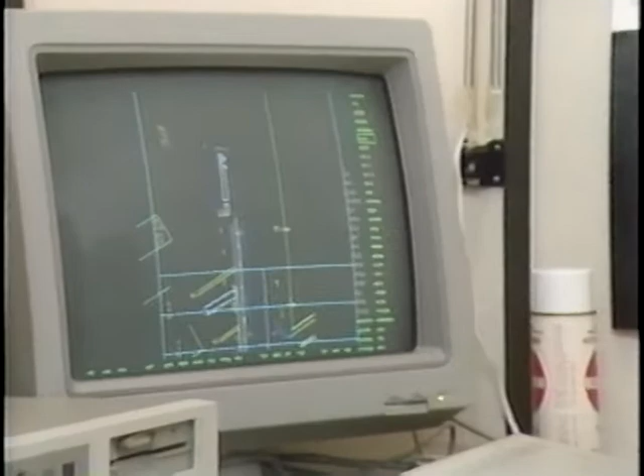This program is about multi-story steel frame buildings. Whether 2 stories or more than 100, they present common architectural and engineering challenges. We will address some aspects of planning, design, function, and construction. In Part 1, we examine the lateral loads which multi-story buildings experience and some fundamentals of design, including the vital communication between structural and architectural design.

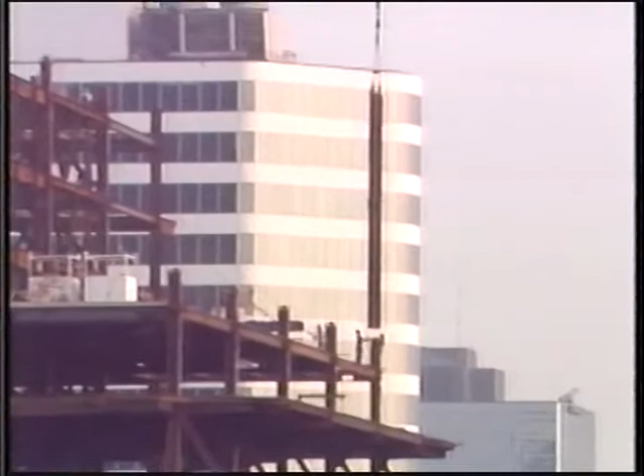In Part 2, we show how steel framing supports the structure, with particular attention to floor framing systems and the integration of essential services. We will also see how the design comes together in actual construction.

Multi-story buildings can expand the scope of suburban areas, or they can rejuvenate urban areas. Their size varies widely. Planners use the term density to describe building size. That is, the ratio of floor space above the ground in relation to the area of the building lot. Densities of 2 to 12 are common, and they can reach 25 or more. Zoning bylaws restrict densities and height and impose stringent rules to create open space and reduce encroachment on neighbors. Buildings built today require longer floor spans and new high-tech services.

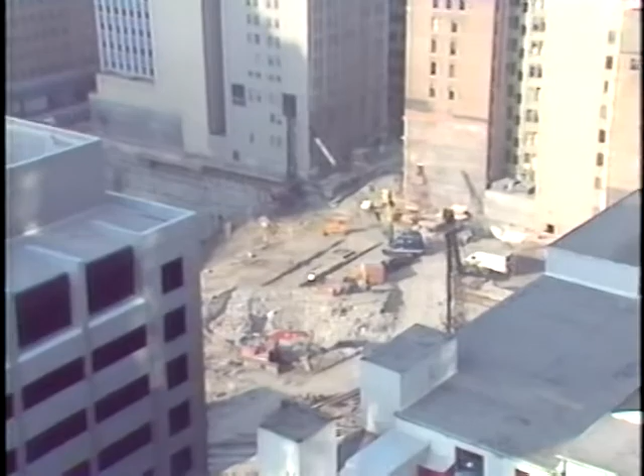The first step in urban construction may be complete demolition of the existing buildings. However, there are other options. Floors may be added to an original structure. Due to the foresight of the builder or the heavy floor loads required by an earlier occupant, this building has reserve structural capacity required to support these 6 additional floors. In this case, the new construction encapsulates the original building inside its new skin. In the third instance, the original structure and its facade are maintained. The new architecture contrasts dramatically with the old.

Whether modified or new, the structure must contend with the forces of man and nature. Nature's influence on multi-story buildings takes 3 primary forms: gravity, wind, and earthquake. Gravity or vertical loads are primarily due to the mass of the building, its furnishings, and occupants. The effect of building height on gravity loads is more or less linear. Wind loads multiply exponentially with an increase in building height. Earthquake or seismic loads vary depending on location and expected severity of an earthquake, based on our short-term historical knowledge.

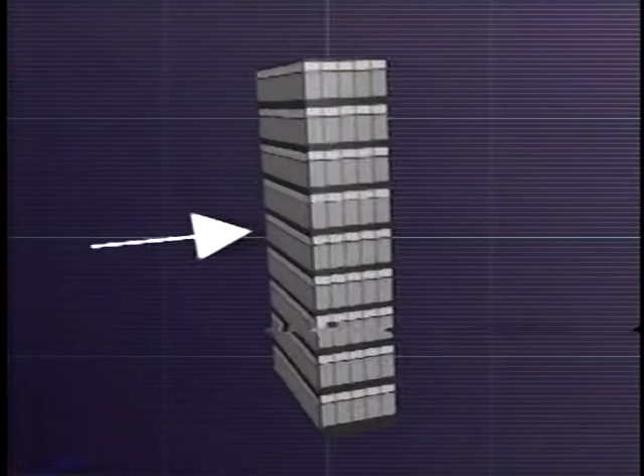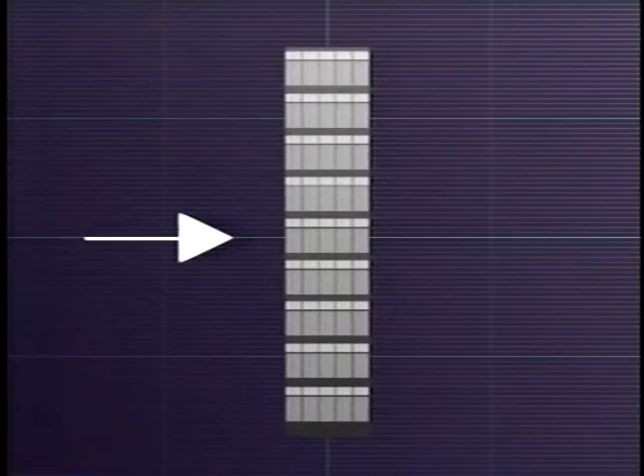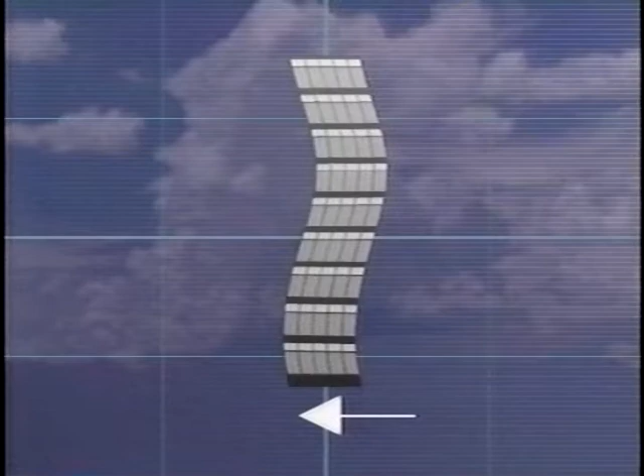For this reason, over and above architectural constraints, the major consideration in developing a structural concept is the capacity to resist lateral forces. Wind loads on the walls are transferred to the structural frame through the structural framing and floor diaphragms. Since all building materials are elastic, these loads will cause a structure to deflect laterally in accordance with Hooke's law. Earthquakes have a similar effect, although forces are exerted on the building by movement of the Earth's crust. The building forms its own movement mode in response to the vertical and horizontal accelerations of its foundations. The designer's major concern in this case is the prevention of structural collapse under extreme loads.

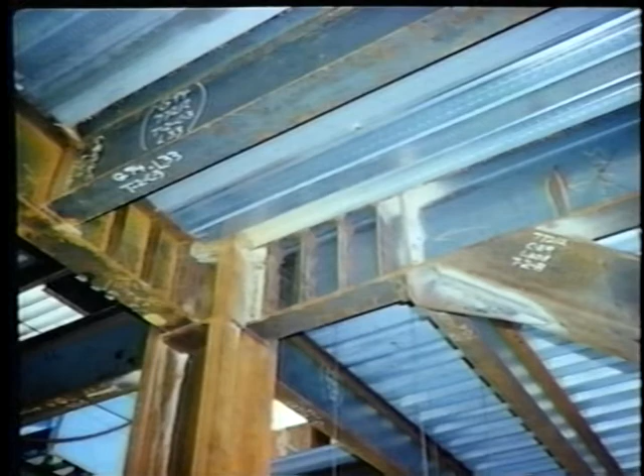Structural steel buildings are renowned for their ability to withstand major earthquake shocks. The reduction in building mass because of steel's high strength-to-weight ratio reduces seismic forces on the building, and the ductility of a well-detailed frame allows it to resist many cycles of extreme load without failure. There are various lateral load resisting systems to be considered. The basic types encompass bracing, rigid frames, and shear walls. These systems act as vertical cantilevers, anchoring the building frame to the foundations. Their function is straightforward, but each is unique as demonstrated by their simplistic deflected shape.

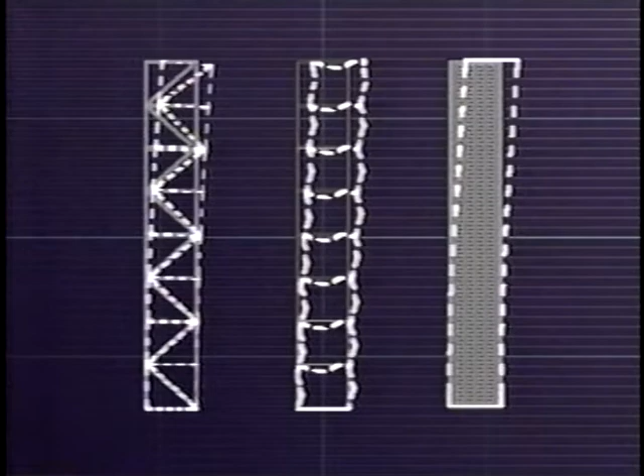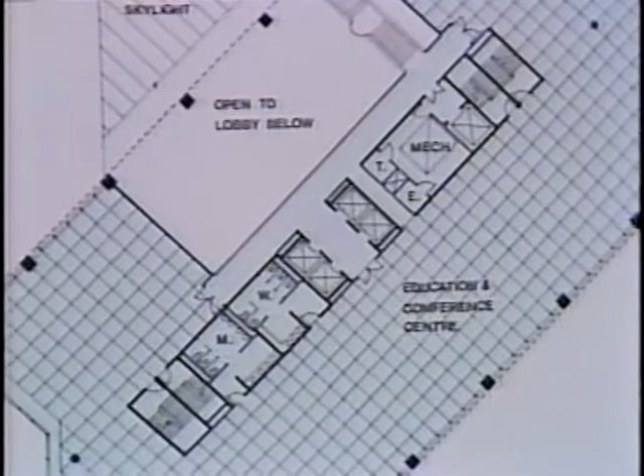Let's consider first the steel-braced lateral load-resisting system. A single-story building frame demonstrates the function of bracing in its simplest form. The performance of each element is clear and simplistic. But as the building height increases, the loads and complexity of the system also increase, and the location of these essential structural elements takes on greater importance. Obviously, the design team of structural engineer and architect has to work closely together. Only in this way can they ensure that the lateral load-resisting system selected meets the needs of the structure and is compatible with the architectural concept.

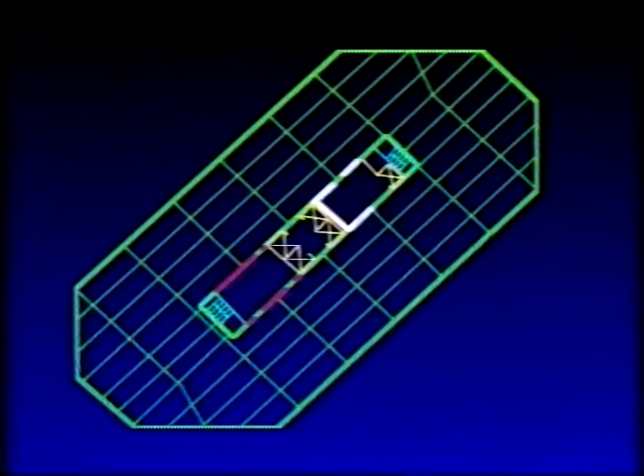One fundamental difference between single-story and multi-story buildings is the need for a service core. It's usually centrally located and holds elevators, stairs, and washrooms, plus mechanical and electrical services. This core is also a logical location for the lateral load-resisting system. Now, let's add more floors. Careful proportioning of the brace frame members will be required to comply with the functional design and still meet the structural design criteria because the core will tend to be more slender. As buildings increase in height above 40 stories, a core system becomes less efficient.

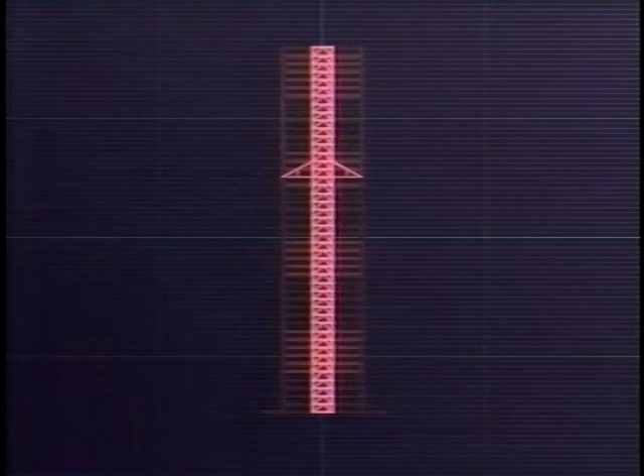However, the braced core can be propped by adding one or more pairs of outriggers off the vertical bracing trusses. These stiff elements, attached partway up the core, transfer forces from the core to columns along the outer walls of the structure. This provides the maximum possible base width for the lateral load-resisting system and the maximum control of lateral deflections. Before we look at higher buildings, let's go back about a century.

Gustave Eiffel faced these same structural challenges in the design and construction of the Eiffel Tower. It was built for the Paris Universal Exposition in 1889, and at 300 meters was, for many years, the tallest tower in the world. The basic structure and the lateral load-resisting system are one and the same. The tapered shape has two effects. First, it lowers wind loads as height increases because the surface area reduces. Second, it provides the wide base required to resist the large overturning wind moment.

Let's explore this concept further and think of the tower as a vertical cantilever. The wind pressures Eiffel assumed on the cantilever created a shear force diagram, which looks like this. From the shear diagram, we can calculate the overturning moment diagram, which varies exponentially with height. Let's be unconventional for a moment and reshape the bending moment diagram to form a shape symmetrical about its vertical axis. Now, compare this shape with the shape of the tower, and we find a remarkable resemblance. Eiffel capitalized on the laws of nature. He shaped his tower to the wind bending moment to maximize its structural efficiency.

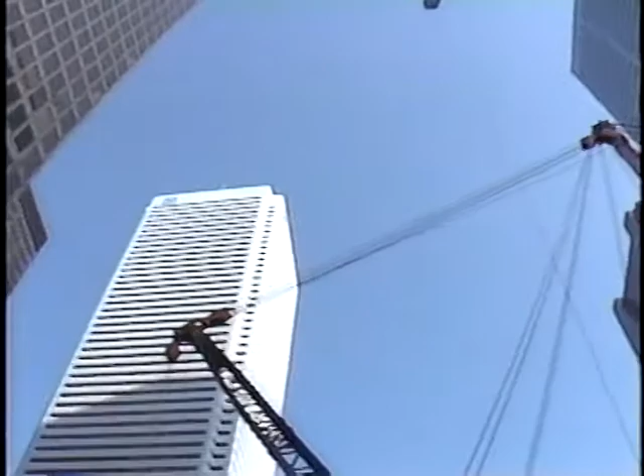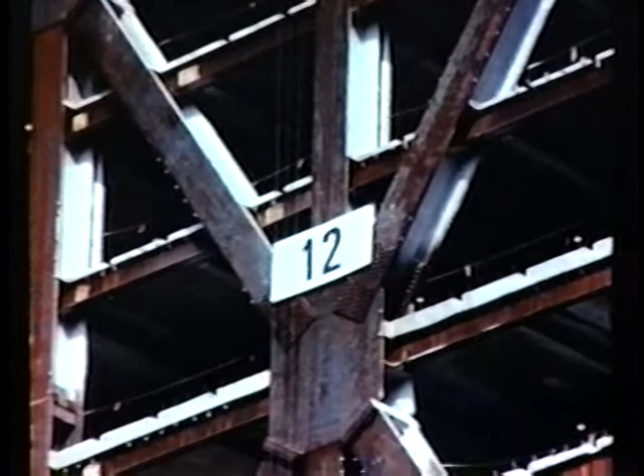Today, we face man-made forces in addition to nature's. If Eiffel had been faced with our building codes, zoning bylaws, density controls, and height limitations, his tower might have had quite a different shape. This 100-story structure, built 80 years after Eiffel's masterpiece, benefits to some extent from the same theory. The world-renowned designer, Dr. Fazlur Khan, found that by selecting this tapered shape and placing wind bracing on the exterior walls, there was no premium for height, no material added to control lateral deflections. Bracing members transfer forces across the face of the structure and around the corners, making the frame perform as a whole, more or less like a box or a tube, hence the term braced tube.

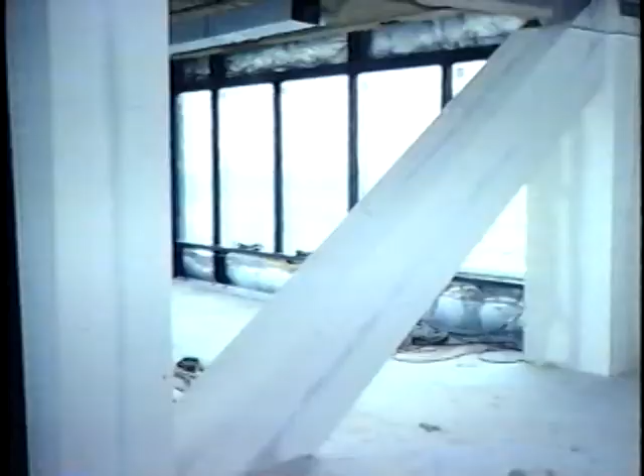Now we have seen diagonal bracing used from 1 to more than 100 stories, but what if we build without them? This involves an entirely new concept, the rigid frame. The rigid frame is formed by rigidly connecting columns or verticals to girders or horizontal members. Lateral forces are resisted by bending and then by axial loads in the columns. The rigid frames may be located on the perimeter frame of the building or throughout the entire structure. Rigid frames are often used where ductility is required for earthquake resistance.

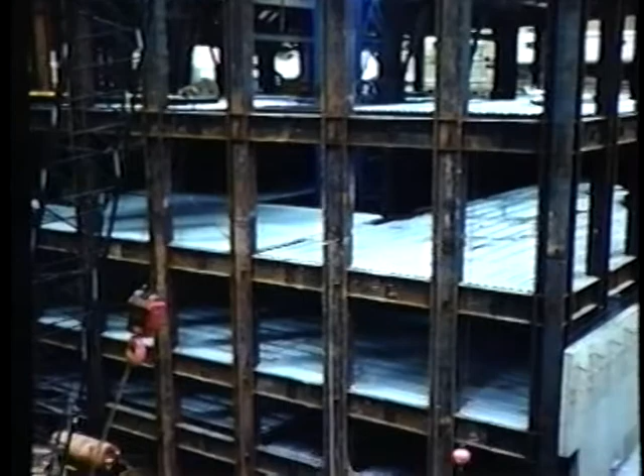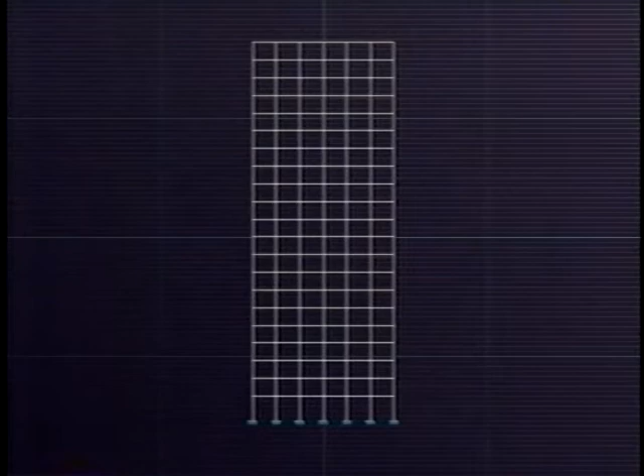In shorter, rigidly framed buildings, girder lengths are usually 2 to 3 times the story height. As building heights increase, rigid frames with widely spaced columns become less effective because of the lack of girder stiffness. If columns are placed more closely together, girder length is reduced, stiffness is increased dramatically, and a framed wall is created. Stiff connections can be provided to transfer forces around the corners of the building frame, making the structure perform as a tube, logically known as a framed tube.

This structure has the obvious characteristics of a framed tube, with a deep steel spandrel girder. Closely spaced columns breaking the span of the girders are somewhat disguised by the horizontal accentuation of the architecture. In a similar structure, the architecture has a dominant vertical accentuation. The deep spandrel girders that match column stiffness and create the tube effect remain hidden behind the glass facade.

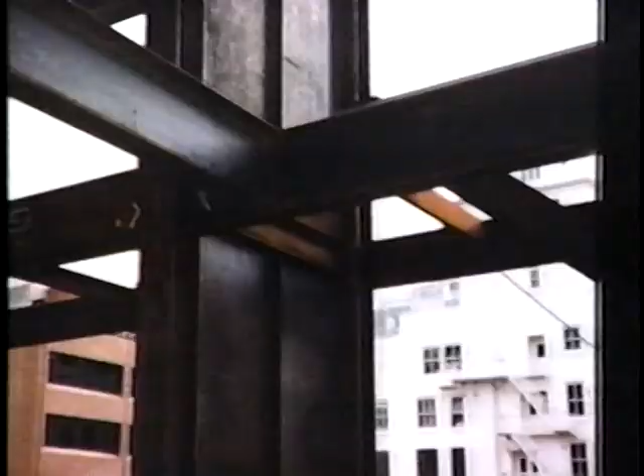There is one more major lateral load-resisting system to consider, the shear wall. The obvious location of shear walls is in the building core. Methods of building the core can vary dramatically. In this example, steel shear walls resist lateral forces directly in shear and bending. Each wall consists of a thin steel plate with edges stiffened by columns to form what is, in essence, a deep beam, cantilevered off the foundations. Larger steel plate core walls have also been used.

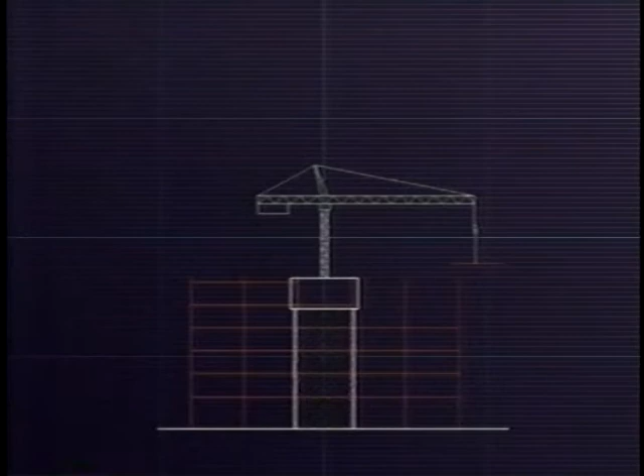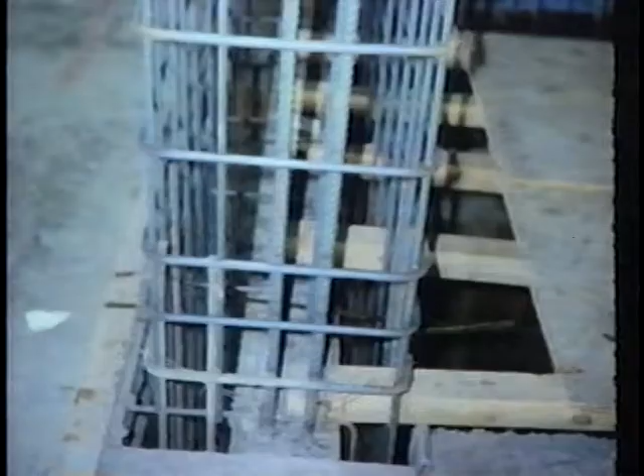Frequently, shear walls in the core are concrete. These cores may be built ahead of the steel frame, with the steel frame, or behind it. Concrete cores built at the same level as the structural steel do not allow maximum efficiency of either core or frame construction, so we will not consider that method further. When steel frames are built ahead of the core walls, steel erection may proceed independently of other trades. Temporary steel columns, extra steel beams, and temporary bracing must be used to resist construction and wind loads on the frame. Infill shear walls are cast after steel erection.

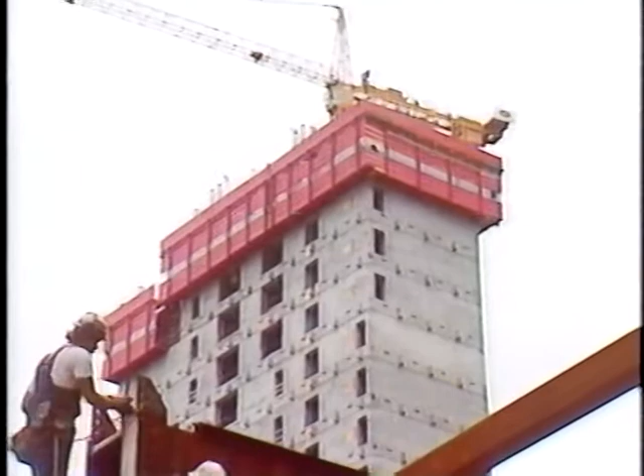When the core precedes the steel frame, the vertical gap in construction avoids conflict between core construction, steel erection, and other trades which follow. In a core ahead project, an experienced contractor will accelerate core construction to a maximum because the steel frame will proceed at a faster rate and catch up. Ideally, the catch-up does not occur until the top of the building is reached.

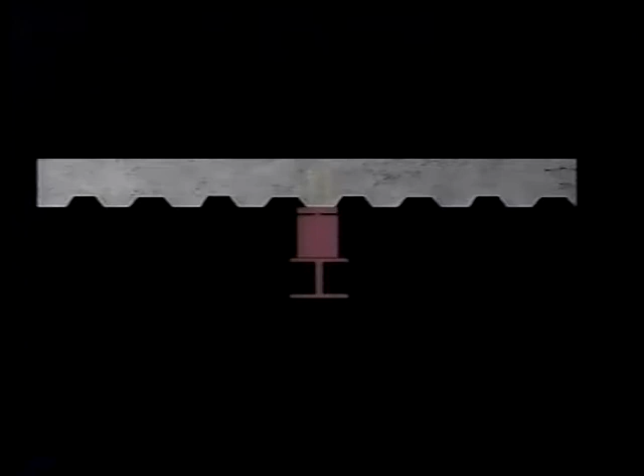As we have seen, multi-story buildings indeed have many facets, including height, size, and shape. We have reviewed lateral loads and structural systems to resist these loads. When we continue with Part 2, we will explore some of these systems in action, along with various floor framing systems. And we will also explore the construction techniques used to erect steel-framed buildings.

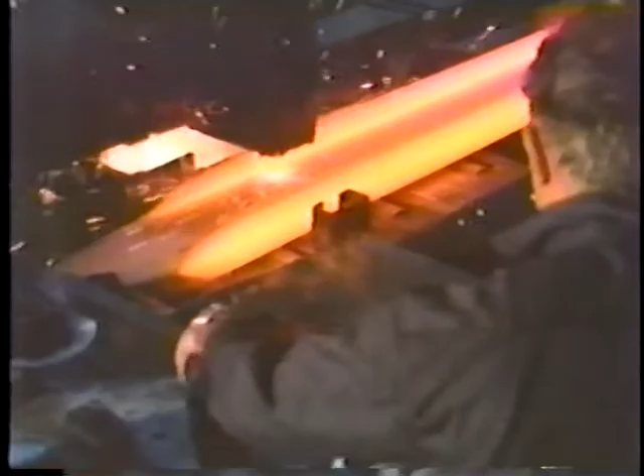In the first part of this program, we reviewed basic multi-story concepts and lateral load-resisting systems. Now let's look at floor framing systems and steel frame fabrication and construction. Since floor framing systems represent a major component of multi-story building costs, they demand particular attention. The simplest and most conventional framing system is hot-rolled wide flange beams. This is the least expensive material, requiring a minimum of fabrication labor. Mechanical ducts may pass beneath the beams or through holes cut in the beam webs during fabrication.

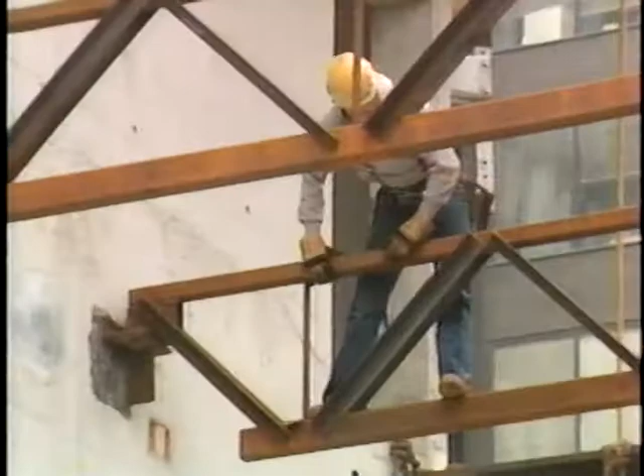Trusses are an alternative framing method. Triangulated web members in one of several configurations join top and bottom chords together. Trusses are lightweight, efficient on long spans, and they provide ready-made openings for services. There are other advantages. Because each component may be sized for specific tensile or compressive loads, we can achieve considerable cost savings in spite of the increased labor for fabrication.

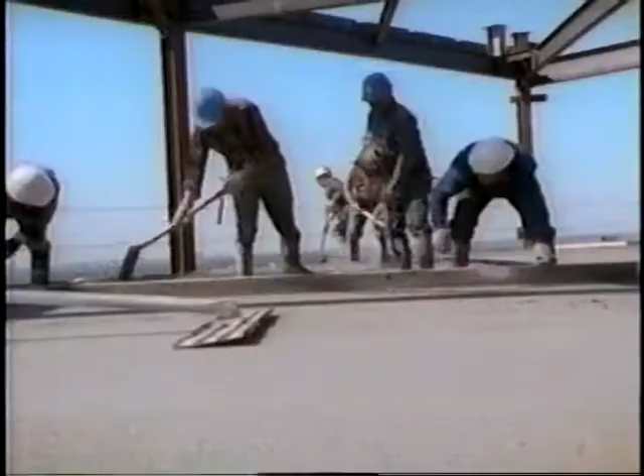We can capitalize on the standard concrete floor slab placed on steel beams or trusses by using steel as the tensile component and concrete as the compression component in flexural members. The resulting compositely designed members provide a more economical use of the structural steel.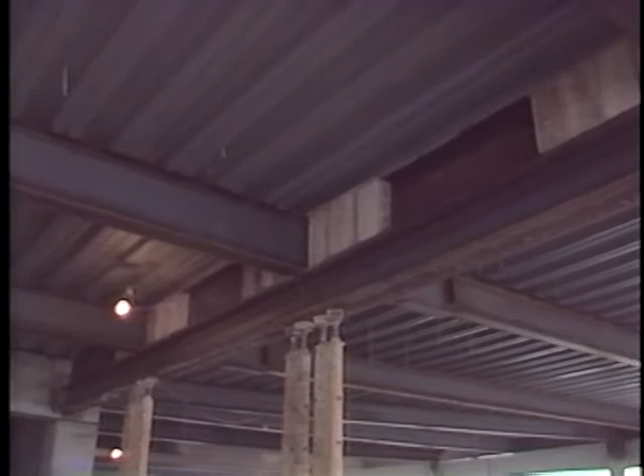Although beams and trusses may be composite or non-composite, a third floor framing system, the stub girder system, must be compositely designed. This system was developed to minimize both structural steel content and building story height, and in this case, the concrete floor slab must be connected to the stub girders with shear studs, forming the top chord of a composite member. Since stub girders develop a substantial part of their strength from the concrete cover slab, they must be shored while the concrete is placed and cured. Beware of unnecessary expense for excessive shoring. A simple arrangement of shores is usually all that's necessary.

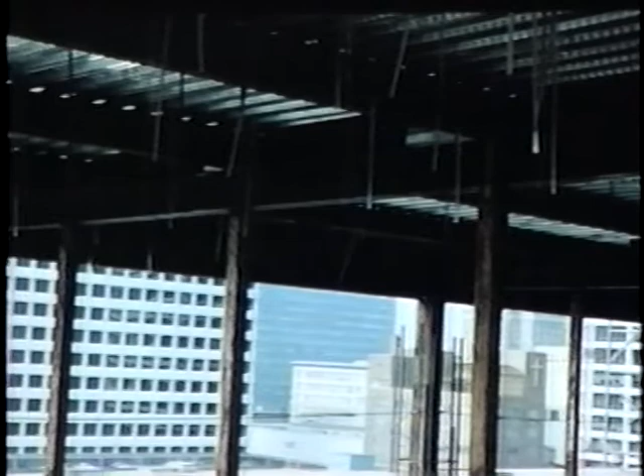The size of a column shaft is governed by the loads at the lowest story of that tier. The upper levels of a tier will be somewhat oversized, but using the same size member for 3 stories means that floor framing at all 3 levels will be the same length. This increases the number of identical pieces and reduces the number of shop drawings. It also cuts down on the risk of error or fit-up problems during construction.

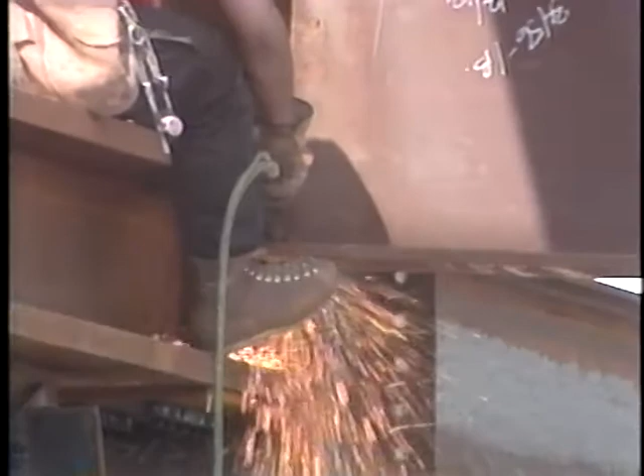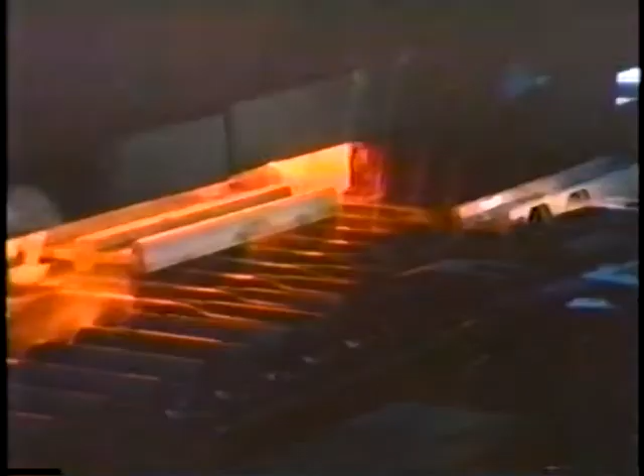While we have been preoccupied with design, steel making continues as an ongoing process at the mill. The basic oxygen furnace feeds the continuous casting lines, producing dog bone shapes destined for wide flange beams, and slabs destined for the plate mill in anticipation of orders. When design is complete and a contract awarded, the next step is ordering the steel. Various quantities of sizes and shapes will be required. The steel fabricator prepares order bills for material and shop drawings for each component. These drawings provide precise dimensions and identify fabrication procedures.

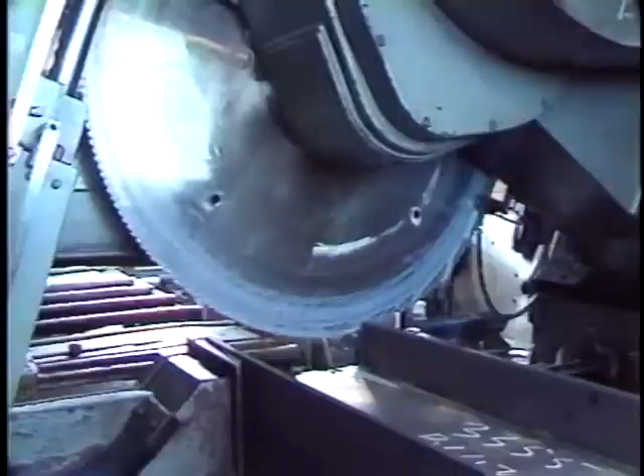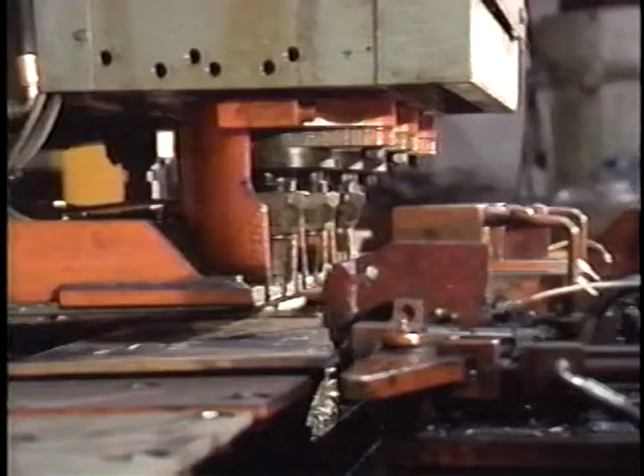Beams and columns can be cut to length with a cold saw that leaves a square finish acceptable for many applications. Larger columns, both hot-rolled and those fabricated from plate, will normally have the ends milled for squareness. Once the materials have been cut to length, a computer-controlled beam line is used to drill holes for connections. Smaller pieces are sheared to size and holes are punched as required. Fitters and welders add the connections to the beams and girders for assembling the components into the building frame.

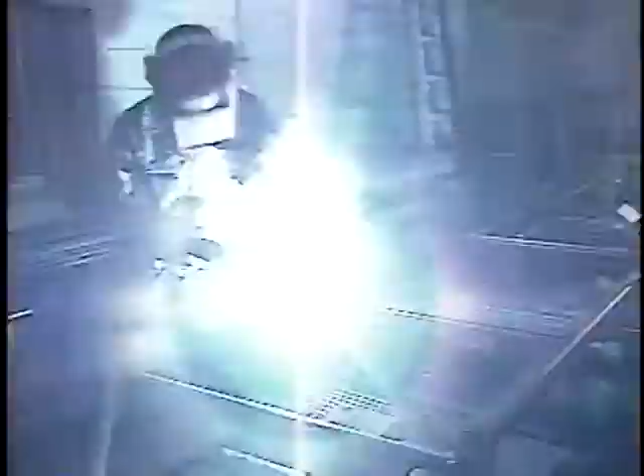Trusses are fabricated from pre-cut components and welded on an assembly line basis. Today's trend is to long spans, and provision must be made for the flatness of such long span floors. Trusses and beams designed to act compositely with concrete floors are light and slender. They will deflect under the weight of the concrete.

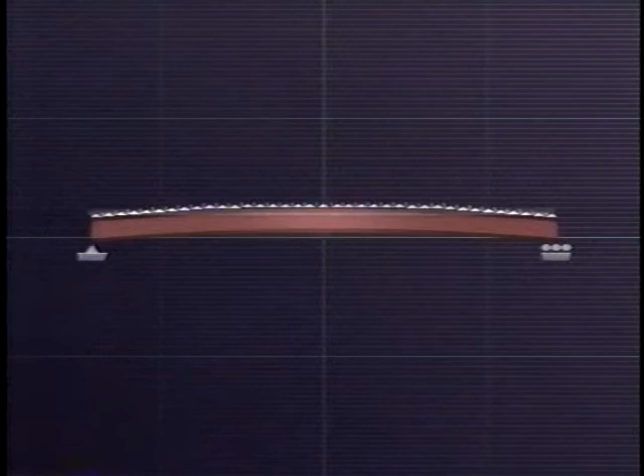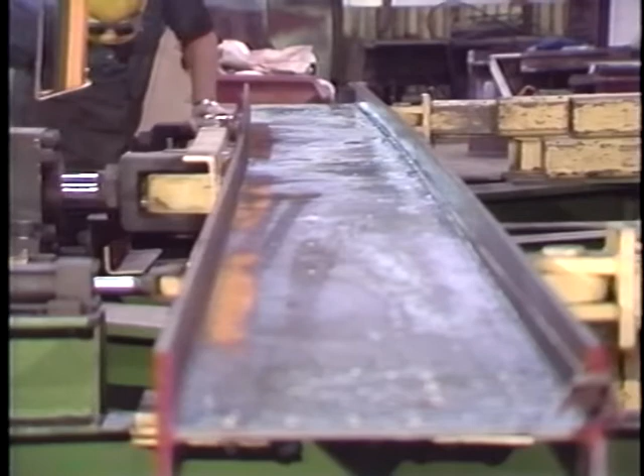To counteract this, an upward curvature called camber can be introduced to assure a flat floor after the concrete is placed. After the concrete is cured, the beam is very stiff and deflections are small under live loads. Beams may be cold cambered by bending with hydraulic jacks. In this operation, the steel exceeds its elastic limit and yields. But don't worry, the beam maintains its original strength.

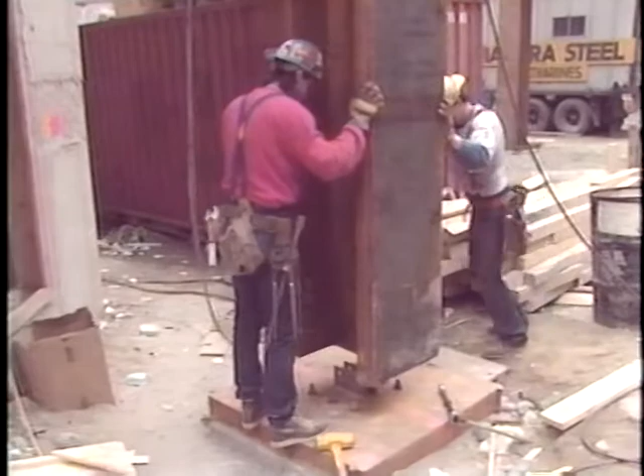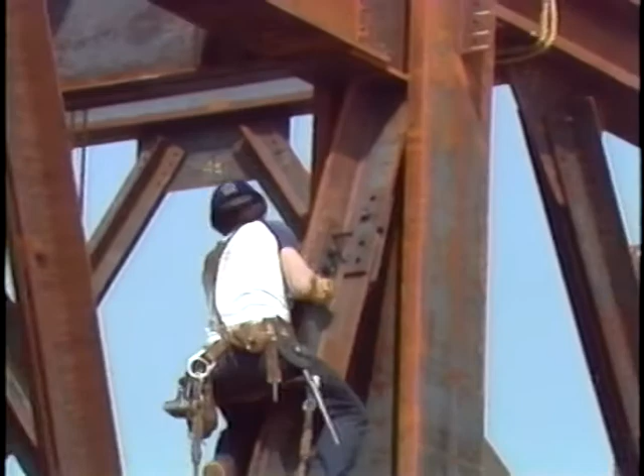Trusses are treated in a similar fashion, but cambering is set up in the jigging operation so that a predetermined amount of curvature is fixed before welding. With fabrication complete, we begin erection. This building has a braced core to provide the lateral load resisting system in both directions. A team of iron workers, often called the raising gang, erects the core elements, the columns, the girders, and the diagonals forming the lateral load resisting system.

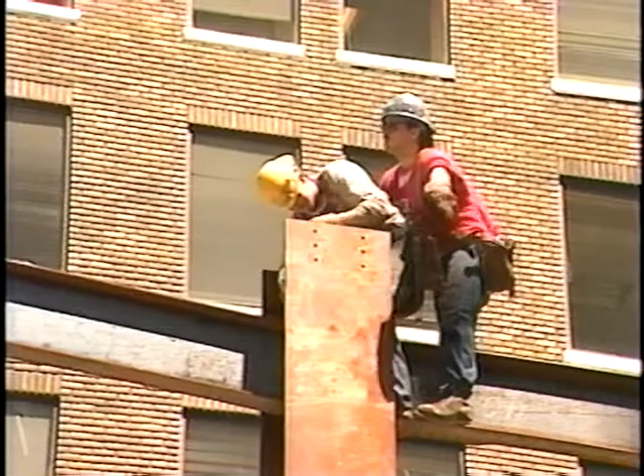The crane operator is directed by radio or hand signals as he places the steel where highly skilled iron workers, known as connectors, bolt the members in place. All framing is plumbed and leveled with precision surveying equipment and is held in place with plumbing cables until the bolting up crew and welders complete the connections.

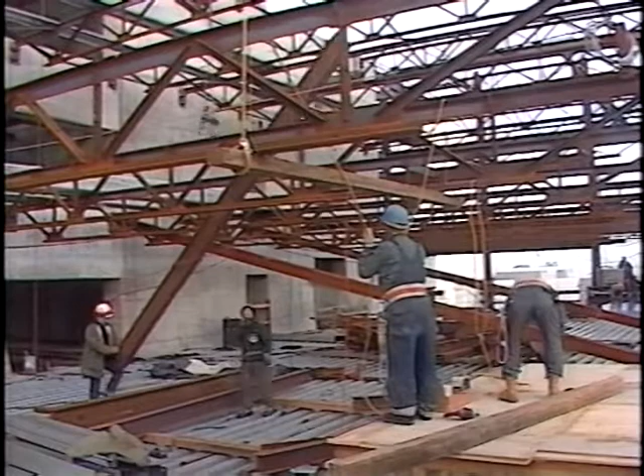Exterior columns are next, followed by the primary framing members, which tie these columns together and tie them to the lateral load resisting system. Once all the secondary framing members are in place, the connections complete and the frame plumbed and squared, the steel floor deck is placed and fastened to all floor framing members. The deck serves as a working floor for iron workers, proceeding with the next tier of steel, and as a safety floor for workers above and below.

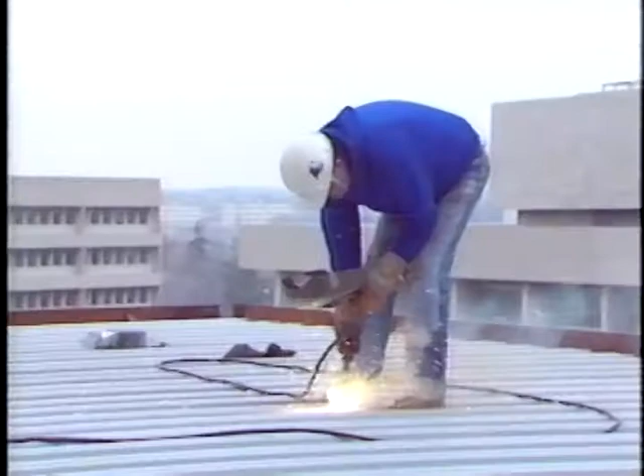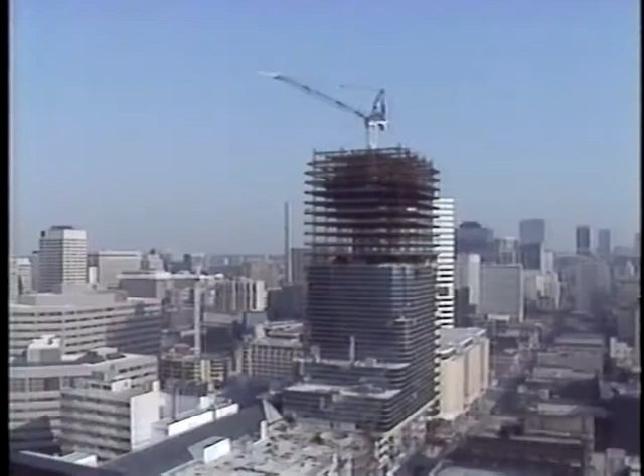Stud shear connectors can then be welded through the deck into the steel framing in areas where the floor framing members are compositely designed. The steel floor also performs an essential function as a structural diaphragm, holding the frame in vertical and horizontal alignment and tying the elements into the stabilizing core. Several levels may be built using this temporary system for stability.

A concrete cover slab is placed on top of the steel deck to provide the finished building floor surface and to provide a stiffer, stronger structural diaphragm. This diaphragm is considered a structural element and is used to stabilize columns in the completed structure. Let's look at some of the techniques used to expedite structural steel erection.

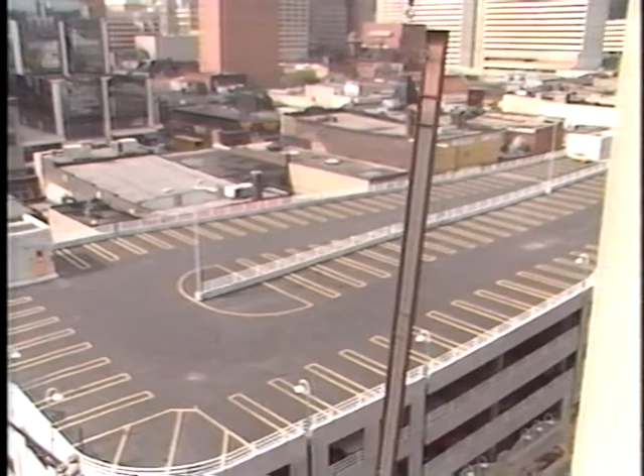Single-piece lifts from ground to work level can occupy the crane for long periods while the hook travels up and down the building. This becomes more critical as structures reach higher. It's more economical to hoist bundles of steel to the work floor, where they can be placed quickly and efficiently using a light runner line on the crane jib.

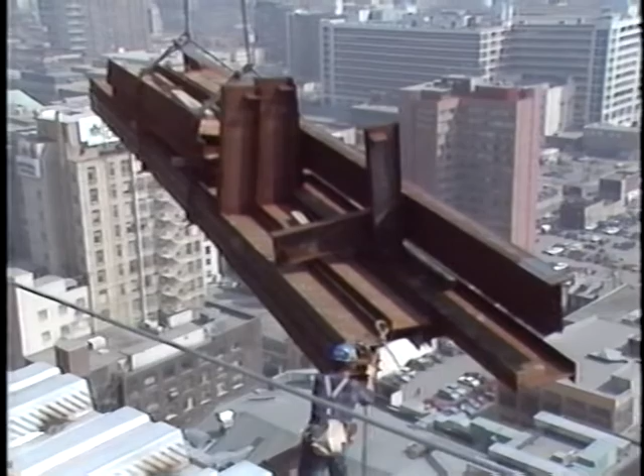Sometimes framing members can be pre-assembled on the ground before being hoisted, saving valuable labor by connectors. This is particularly important at the exterior of a building, where exposure to falling is greatest. The crane is also tied up for less time. As soon as the steel assembly is temporarily connected, the crane hook can return for another lift.

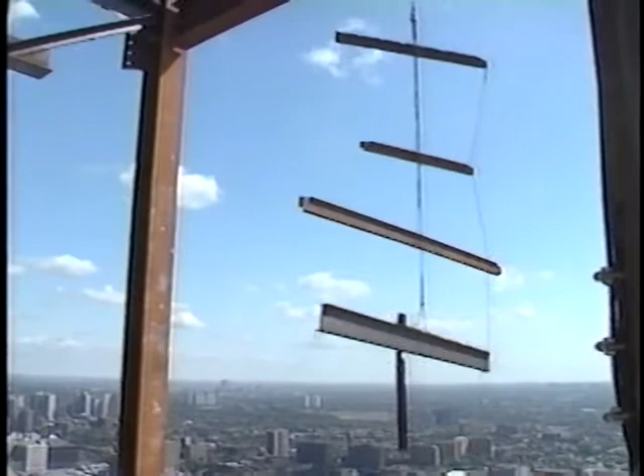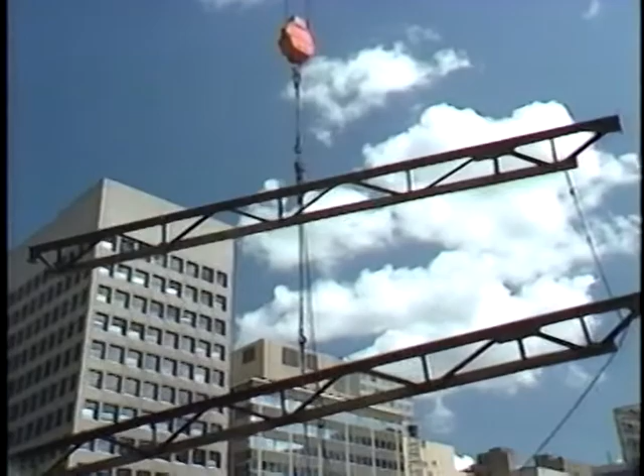Multiple member lifts, slinging one above the other, are also frequently used on higher buildings. These may be hoisted from the ground or from a stockpile on the work floor. While each beam or truss of one lift is bolted in place, the rest of the crew prepares a new multiple lift, and erection proceeds bay by bay around the building.

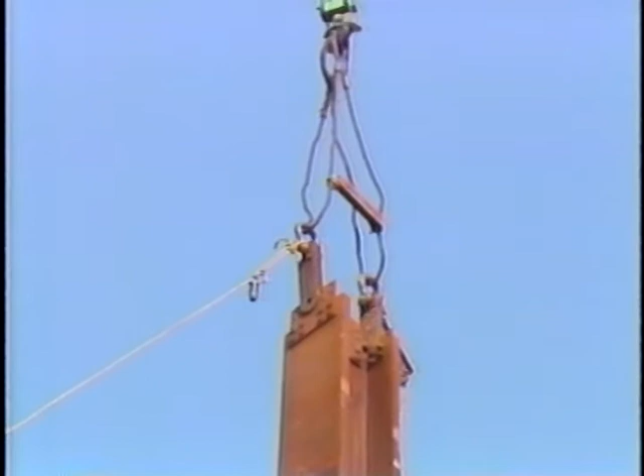Every effort is made to avoid having the connector climb a column to unhook the crane with such devices as quick release hooks, but sometimes a little assistance is required. Next to their spud wrench, usually required for aligning bolt holes and temporary connections, the crane is the most important part of the erection gang's equipment.

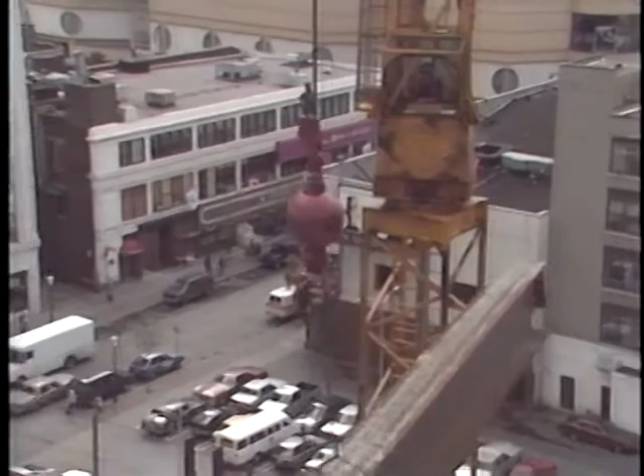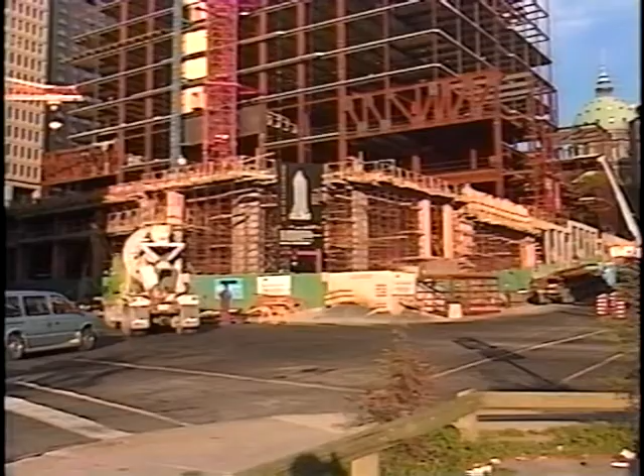There are numerous kinds. In buildings up to 15 stories or more, a mobile crane can sit on the ground outside the building footprint. It will not apply any loads on the building, and construction can proceed without consideration of forces from crane operation. Stationary tower cranes outside the tower footprint can be used on taller buildings, but they must be tied to the frame for stability, which results in some lateral loads being applied to the building frame during crane operation. At the other end of the scale, this crane relies on the building frame for the support of all vertical, horizontal, and overturning forces.

This is one of the world's most advanced cranes. The crane is jumped or hoisted up the tower as each tier of steel is completed. It takes only 15 minutes for the jump, and the crane is out of service for less than 2 hours. The first step is to release the secondary support on the crane tower.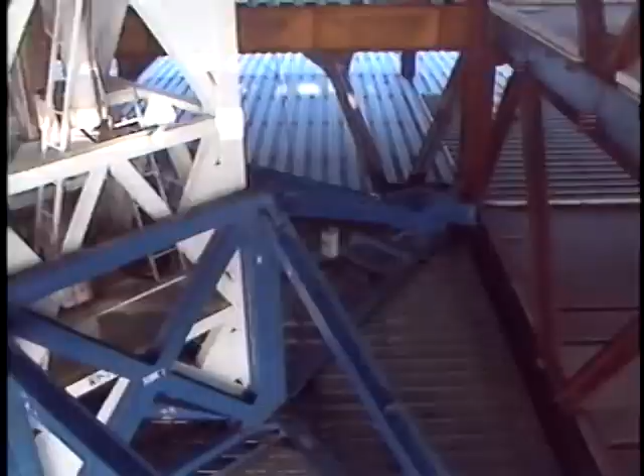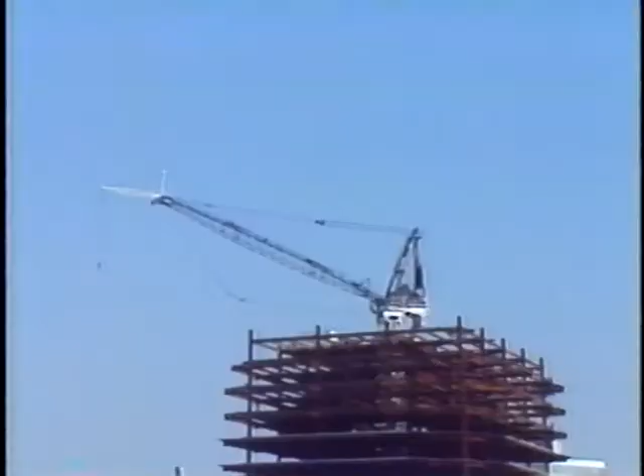Support brackets are hydraulically retracted, and the entire support frame is winched up the tower, guided by rollers running up the corners of the core columns. Once this support frame is secured to the building frame, it becomes an anchor for the hoists, which lift the main support platform and the entire 150-ton crane 12 meters or more up the tower. It is then secured and back in operation.

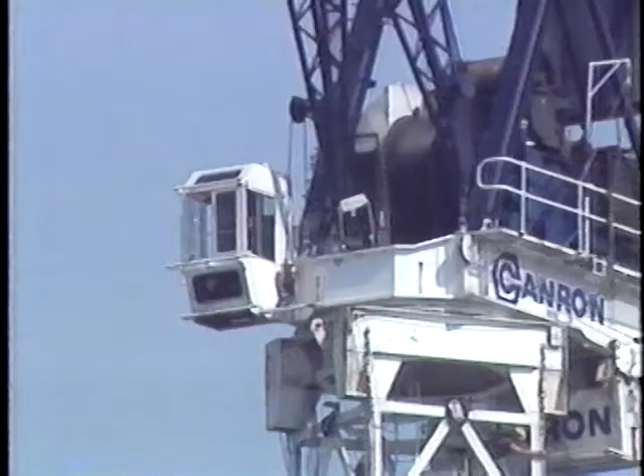The building core design may determine the type of crane used. An all-steel building with a steel-braced core is the simplest. Only one trade is used, and the erection crew's efficiency is at a maximum. Other approaches are common. In this sequence, we can see a special core form system which uses hydraulic jacks to lift itself up the building, keeping the crane free for other duties. This is particularly important when core construction and steel erection are proceeding separately, as mentioned earlier.

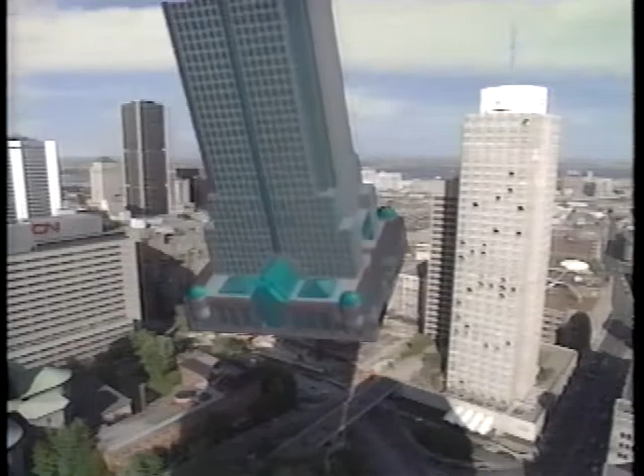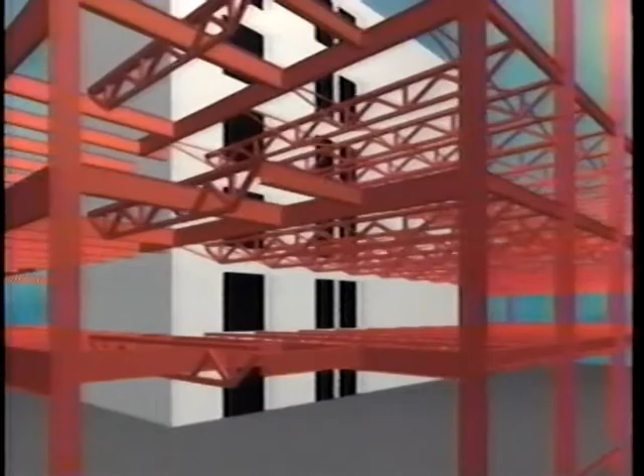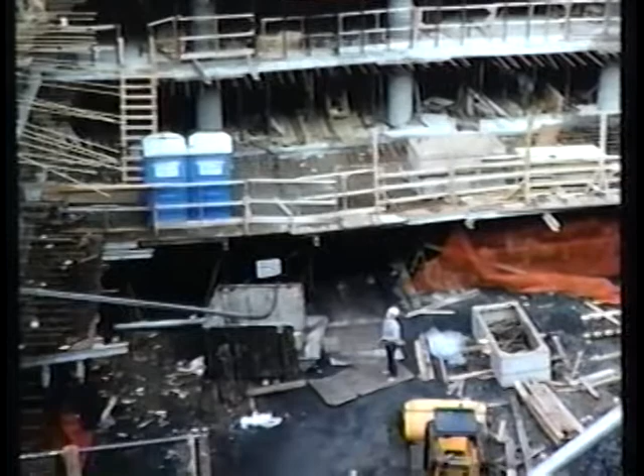Now let's put it all together. This bold statement on the skyline was inserted between two landmark buildings. Inside the facade of stone and glass lies what appears to be a complex building structure. But a closer look reveals a framework of simple elements connected together to create a large clear-span floor area. Construction began with a bus terminal, a parking garage, and other service areas built 5 stories below street level.

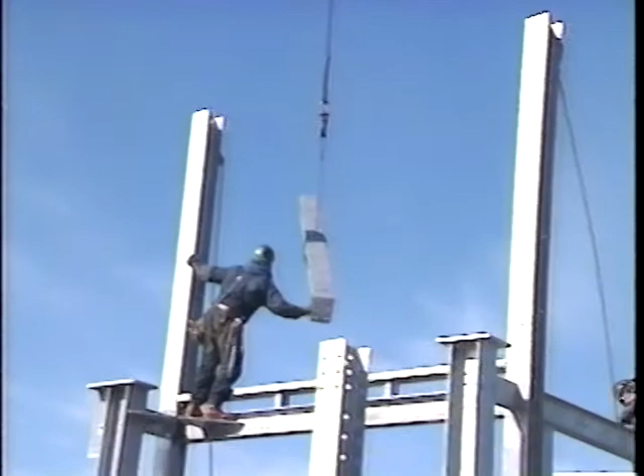Once the decision to build is made, the completion date usually becomes critical. The sooner the better. This alternative design-build steel proposal proved to be a winner. The building service core precedes the framing to provide stability during construction. Steel erection follows quickly, and a few months after the foundations began, the frame is topped off. The construction schedule at this point matched a neighboring building of the same height, which started about 12 months earlier.

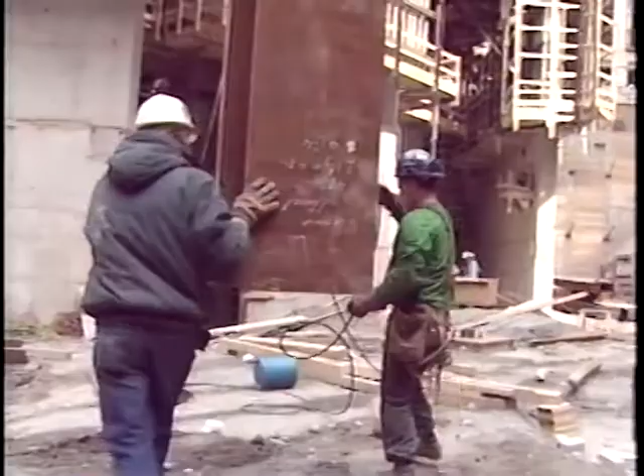A technique sometimes considered to expedite construction of multi-story buildings is to start by erecting freestanding columns from footings to ground level in single lifts 3 to 5 stories high. Using this technique, the tops of the columns are framed in by beams, girders, and deck at ground level, creating a diaphragm to stabilize the columns and to form the base for the tower columns above. Construction then proceeds upward, while the more complex and time-consuming structure below ground level can be built at its own pace, off the critical path.

Earlier we discussed revitalizing the inner city by adding area to an existing building. Let's look at the stock exchange as an example. To make this project viable for redevelopment, its density had to be increased. The method chosen was to add rental space above and around the original landmark structure. We can see graphically how this was achieved.

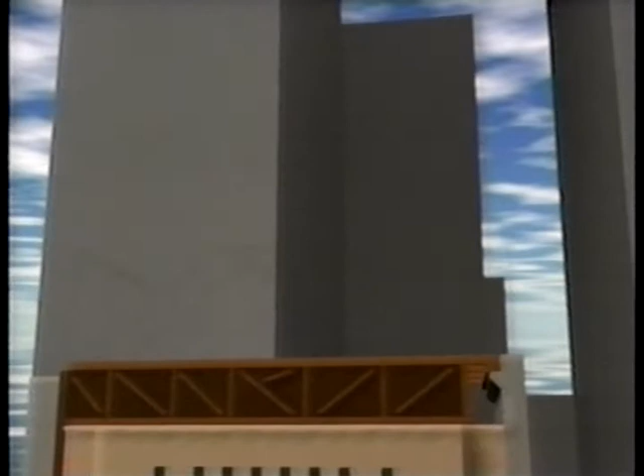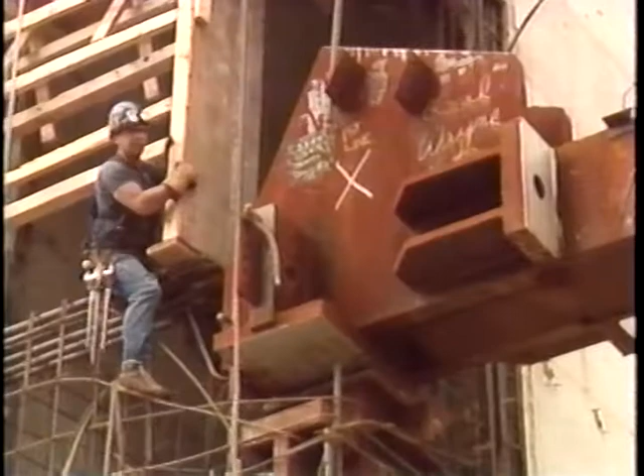Since the existing structure could not support the 25 floors added to the project, a new structure was built around and above it. New columns support 4 massive transfer trusses weighing 200 tons apiece, which in turn support upper-level columns above the original roof. These trusses were too large and heavy to lift or ship, so they were stick-built piece by piece. Precision fabrication and erection were required to prepare the truss joints for hundreds of hours of field welding. Hangers were added to support loads below the trusses, and columns were set on top to support the floors above. The last beam was signed and hoisted into place for the traditional topping-off ceremony.

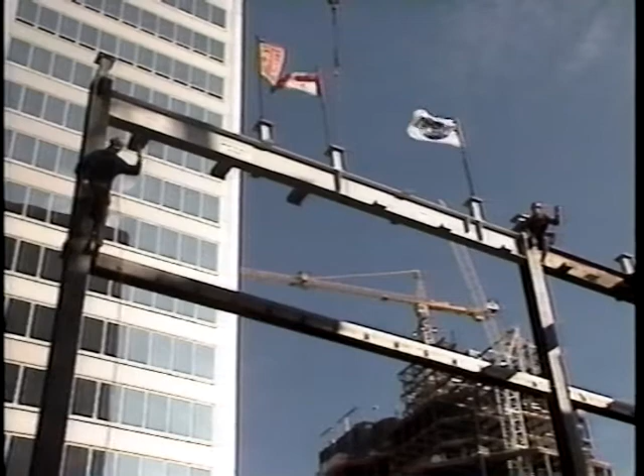Column transfers are often necessary in new construction as well. Note this large transfer supporting 20 stories, but also note the opportunity lost in this situation, where the owner may have been unwisely advised to reject this framing scheme and used this alternative, with a significant loss of prime executive office rental area on the building perimeter. Well-designed structural transfers can provide functional designs and maximize rentable area.

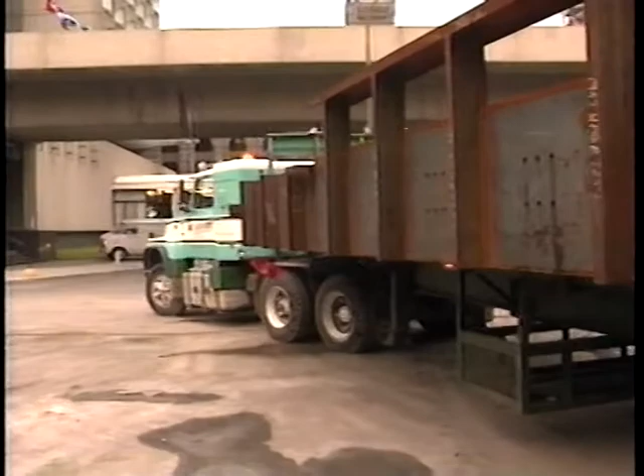For example, this massive transfer truss and this girder were fabricated off-site, trucked to the site, and erected just like more conventional girders. The difference is that this girder permits 2 tower columns supporting more than 30 floors to be terminated at the 5th floor, avoiding interference with a bus entrance below grade and providing a large open area in the lobby. Although this massive girder transfers more than 30 stories of load, this concept is often used in much smaller buildings, but is usually hidden by the architecture, transparent to the tenant, because of steel's ability to carry high shear forces in shallow members. Note the architectural setback achieved in this structure using a simple transfer every 2 levels.

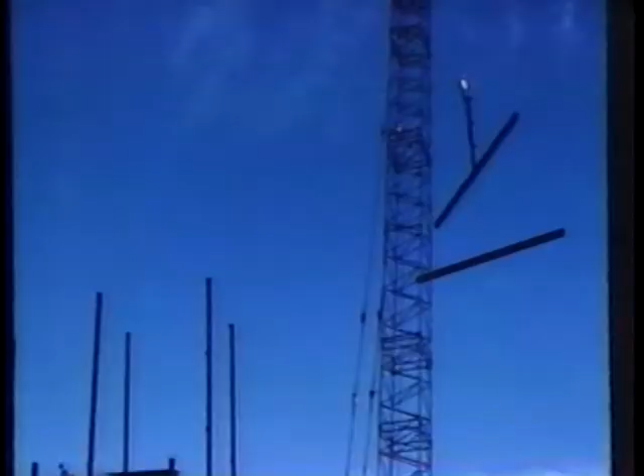The term multi-story tends to make us think of skyscrapers, but as we have seen, a multi-story building can have as few as 2 stories. In buildings of any height, steel framing is a part of effective and efficient architectural and structural design, withstanding the forces of man and nature, and meeting the needs of owners today and in the future.